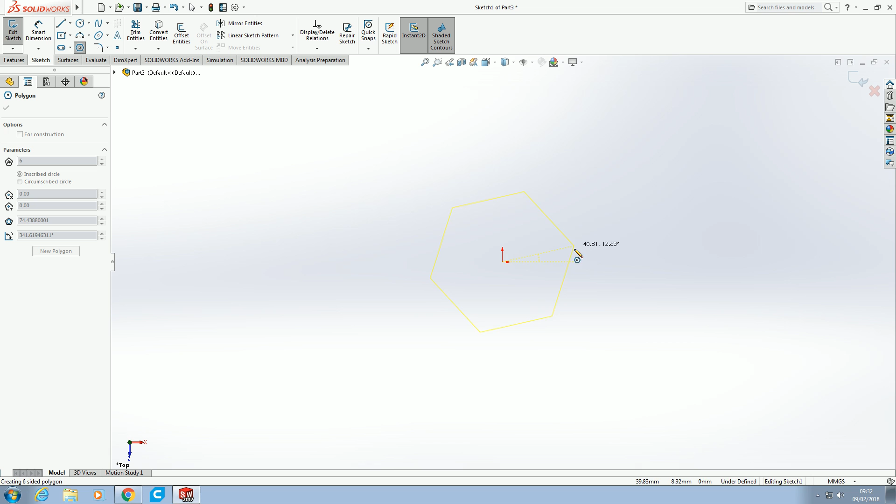Now to do this, you start with the center point, so you can click on our origin because it needs to be central. We pull out for it. Straight away here you can see that you've got the hexagonal shape. Okay, and just drop it. There we go, so we've got a hexagonal sketch.

Now the clever thing about this, of course, is because it's locked to the middle, it will now get bigger and smaller quite happily, stay to the middle, but it also will rotate or pinwheel. Okay, so it just spins around.

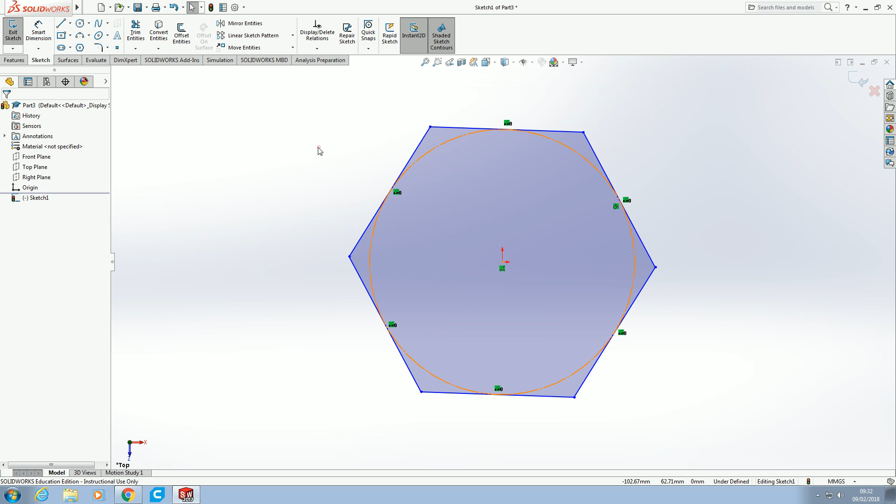Now because polygons are clever, this guide circle in the middle is basically all the dimensions you actually need to give it. So if we dimension this circle here to 18, that means the diameter is 18, the across faces value is 18 because it's the distance between faces, and because the angles are all the same and it always touches against this circle, it means it's 18 between every set of faces, all the angles preset.

So that's now fully defined. Problem is, of course, it's not fully defined - SolidWorks tells us it's underdefined and that the sketch lines are still blue. So what we need to do really is stop it pinwheeling, because it no longer changes shape or size, but it just pinwheels around. Now this isn't too much of a problem if you're doing something simple. Where we're going to get something a bit more complicated later, it will make a lot of difference.

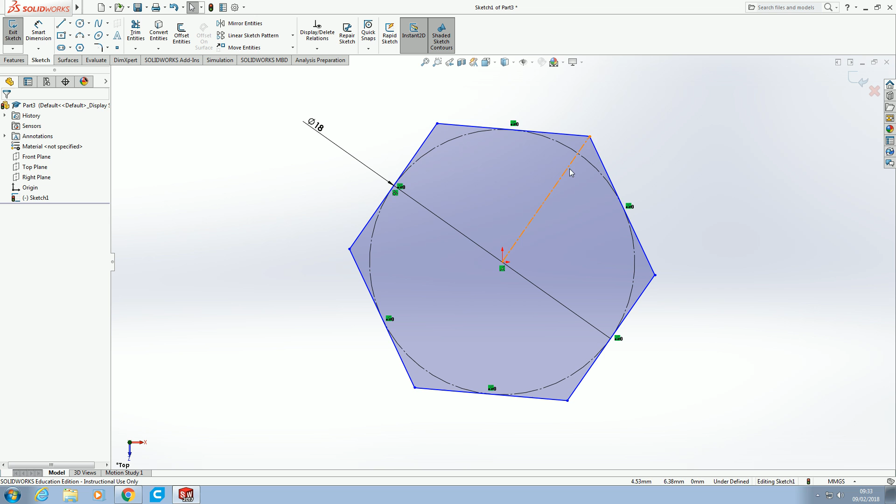So what we're going to do is use a center line from the origin point just to one of the corners. Okay, so that now acts as our guide, doesn't it? So that stays together, and I'm going to make this vertical. By making that vertical, that line has basically given the final bit of definition to this hexagon. It's stopped it pinwheeling. So that's nice and simple.

We'll do then just end our sketch as usual. Give it a thickness - let's do this 10, nice and simple. Okay, so there we have our hexagonal block.

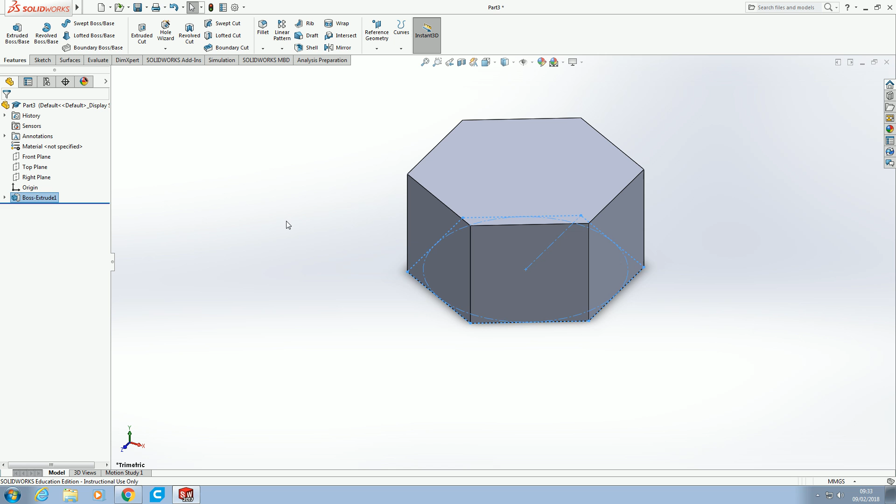Now, if we're making it into a nut, it's nice and simple. Use Hole Wizard because it always makes life easier when we're doing threaded holes.

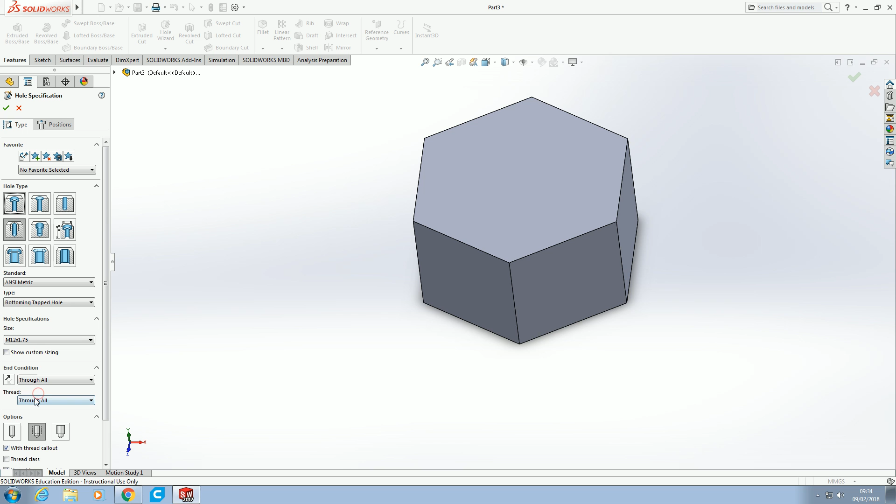Do straight tap, metric, bottom tapped, hole size M12, and we can go all the way through. That's okay. Hit position, click face, on the top.

Now looking at that, that's put a countersink on it, which I don't want. So let's just go down here. There we go. So we need to just take the countersink off here. That's better. Tick that. There we go. So we now have our threaded hole.

You can tell that by the fact it's got the extra little thread line around the outside that comes with saying hole thread. We can just go back through the options, document properties, detailing, shade our cosmetic threads, and then hit OK. There you go, that shows it's done.

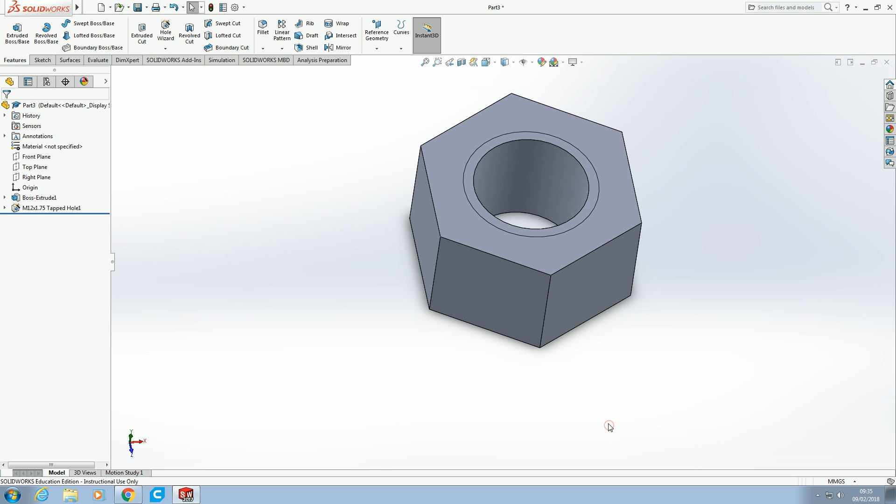Now this is a very simplistic nut. If we're looking at something a bit more complicated, we know that we basically chamfer off all of these corners because they would be weak points.

Now the easiest way to do this is actually to do a revolved cut, and what we're going to do is we're going to put a revolved cut on this right plane, because the right plane cuts through the tips, and that's because when we did our hexagon we locked it to the vertical. Okay, so that means that those tips will now go through that plane, which is perfect for what we want to do.

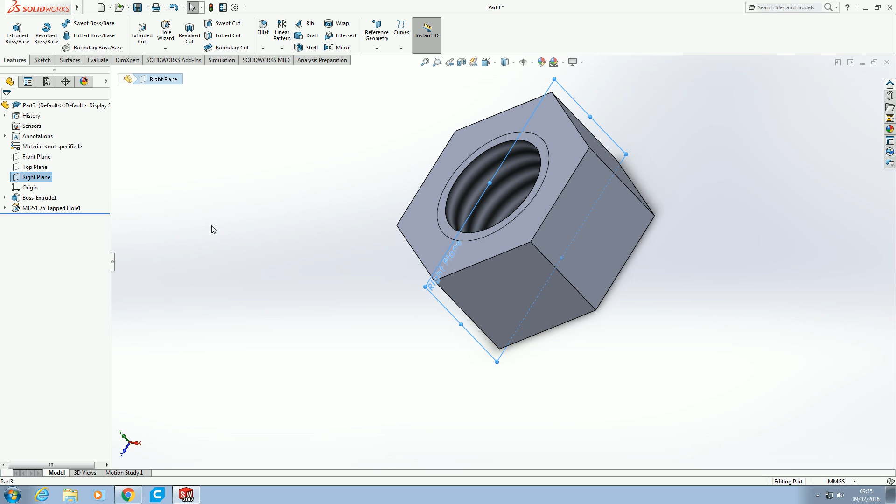So let's normal to, so it spins around. Excellent. Do a revolve cut. I'm going to quickly throw a center line in the middle. There we go. And then I'm going to use a normal line tool to basically draw the chamfer that I want to cut away. So I want to cut just sort of on here.

You need to make sure you don't select the midpoint, otherwise you lock it in. So just select somewhere on the line, somewhere on this line down here as well. Close it out, because I want to do the same top and bottom. Just going to do it like that.

There we go. Now I want to do the distance from the center to the tip of the triangle. That basically wants to be my radius. So when we did the original hexagon, we did an 18 diameter, so now we want to do a 9 radius. And what this basically means is when it spins round, it will just follow the line of that circle. In fact, we'll explain that a little bit more in a minute.

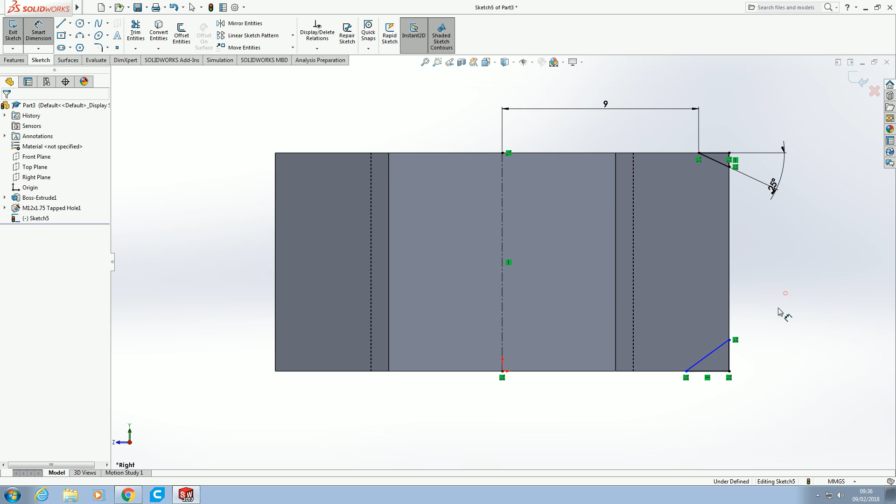Typical angle for this sort of chamfer is about 25 degrees. So we'll do the same down here. I'll be lazy because I don't want to measure it again. Click on that point, hold control so you select that point as well. So you've got 2 points there, you want them to be vertical. There we go. So that locks them together.

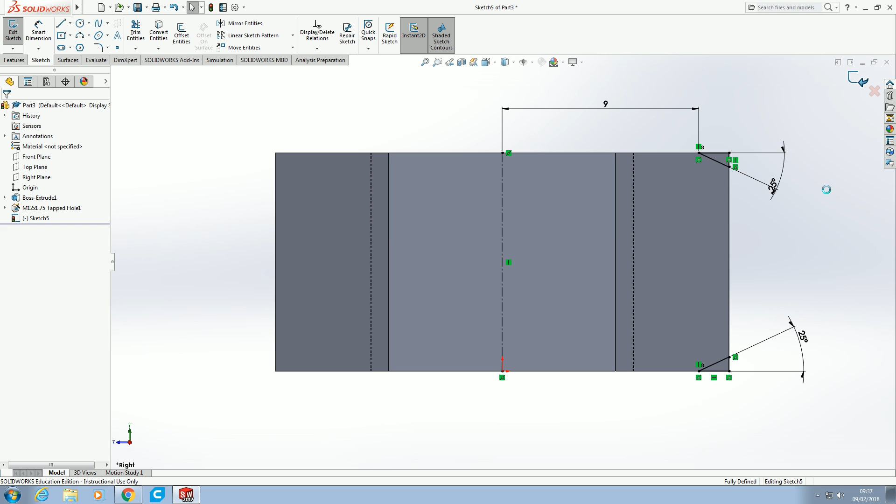Okay, so I've got both of those sketch triangles. I've got my centre line. So then when we do a revolve, it should automatically work out what I'm doing. There we go. And what we can see when we look up here is that it's going to cut just that shape round. Now at certain points, it basically is cutting nothing, because that's where the face touches, but then the rest of the time it's taking off the tips of the corner.

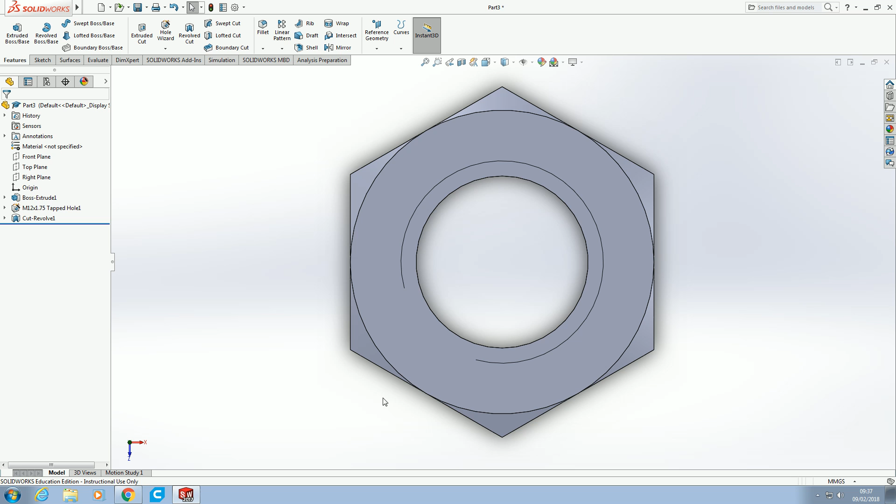So if we just tick that, there we go. So we can straight away see when we look at it from the top, it basically looks like that guide circle again, doesn't it? So that's the diameter, so it's the across face value, and then you've just got the tips taken off of the corners, which means it should be a lot stronger shape. It won't get the same sort of error in the corners.

Okay. So that's the basics of how to create a nut in SolidWorks.